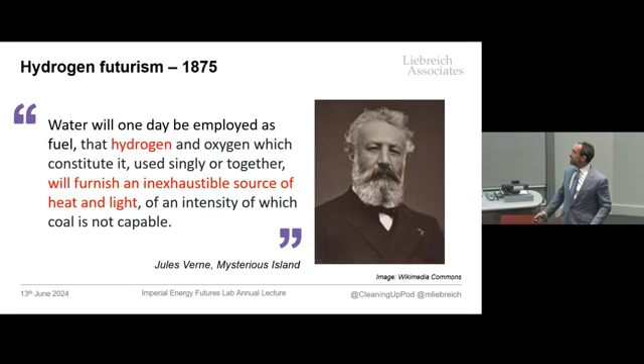It even lured a young doctor, a young chap called Michael Mainelli in the year 2004, who said, without moving almost wholly to renewable hydrogen power, significant climate change is unavoidable. Now, you could argue that significant climate change is unavoidable, but it won't be because we didn't move to renewable hydrogen power. And of course, Michael Mainelli is now the Lord Mayor of London and the person who delivered that 18th Lord Ezra Cadent-sponsored speech.

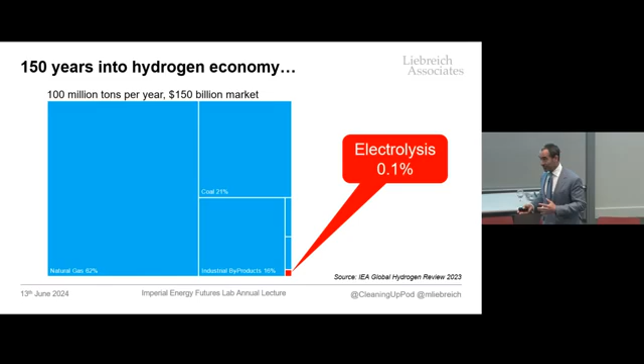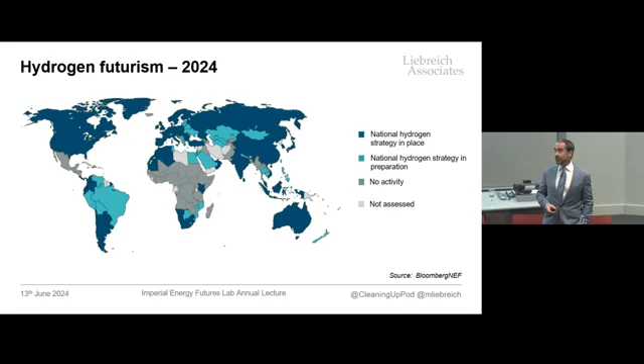Nevertheless, the state of hydrogen, and the extent to which people have been mesmerized by it—there are now 56 countries with hydrogen strategies. Every self-respecting country has one. Japan, for instance, was actually the first country to have a hydrogen strategy, and the first country after the oil shock to go all in on hydrogen. The Prime Minister there talked about shifting to and developing a hydrogen society. So hydrogen economy, hydrogen society—it's kind of the same thing, at least in my mind.

It's critical for achieving decarbonization, says Ursula von der Leyen of the EU. Hydrogen is the natural starting point.

One of the things that's kind of fun is I have a podcast called Cleaning Up. I've had 160 guests or so, and the tagline is leadership in the age of climate change. I've had all sorts of extraordinary people come on—everybody from the woman who glued herself to the Shell headquarters to the person who develops the Shell scenarios. I've had Tony Blair, I've had Tony Abbott. I try to get everybody on, and if you haven't listened, please do, because I have a lot of fun. My co-host Bryony Worthington, who's now over on the West Coast, and we try to get the best guests and challenge them.

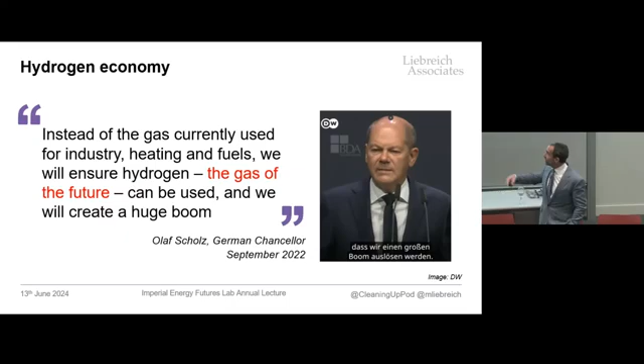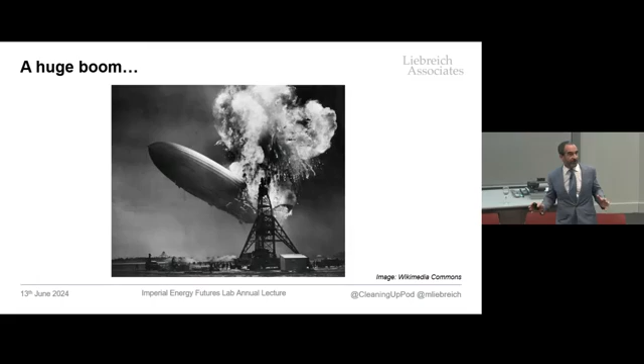Scholz also said we'll create a huge boom. I normally don't show this because it's almost irrelevant, except that the Lord Mayor did show this photograph and said, well, only 36 people got killed—it could have killed 96, but it only killed 36. So I'm sort of obsessive about safety, you'll find that out as well, and I think Kate, whom I've worked with on a few safety issues, will know that.

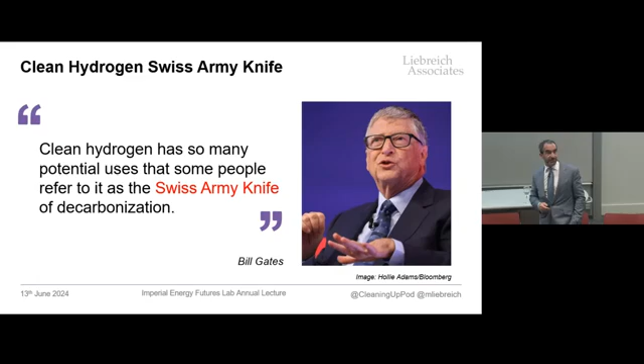Every self-respecting politician seems to have been mesmerized by this whole hydrogen thing. This one's interesting—Jennifer Granholm, Secretary of Energy in the US, says it's the Swiss Army knife: hydrogen economy, hydrogen society, the Swiss Army knife of zero-carbon technologies. Bill Gates says some people refer to it as a Swiss Army knife too, and I'm quite proud of this because I think he's talking about me, since I've been using this. I actually stole this meme from a guy called Paul Martin, who does astonishingly good work. Paul, if you're watching this, thank you, at least for the meme, but also for your work.

And the Swiss Army knife is fabulous—it's a great analogy because you can indeed do all sorts of things with clean hydrogen: transport, heating, chemical feedstock, a building block for chemicals, all sorts of things, land transport, air transport, everything.

The problem is—well, the good news is the analogy is perfect. It's perfect because we've all got Swiss Army knives, right? And we don't do with them everything we could. We don't cut our hair with them, we don't prune trees with them. I went to Japan and said, you don't prune your bonsai trees with them. You don't butter your sandwiches with the little knife.

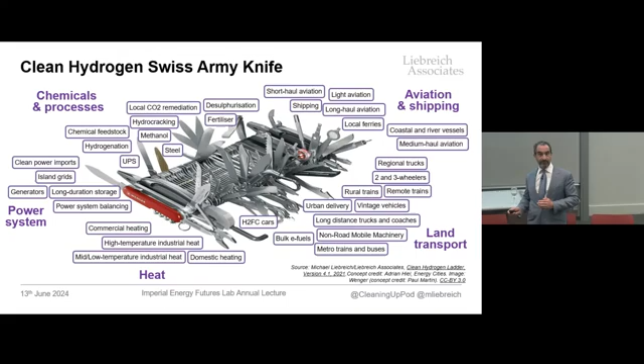There's no way you... why? And the reason is there's almost always something cheaper, safer, and more convenient. Remember those three words: cheaper, safer, more convenient. The only time we really use a Swiss Army knife is if it's cheaper, safer, more convenient, or there's no alternative at all. Hydrogen will play the same role in the economy. It will only be used where it's cheaper, safer, more convenient, which it never is, or where there's no alternative.

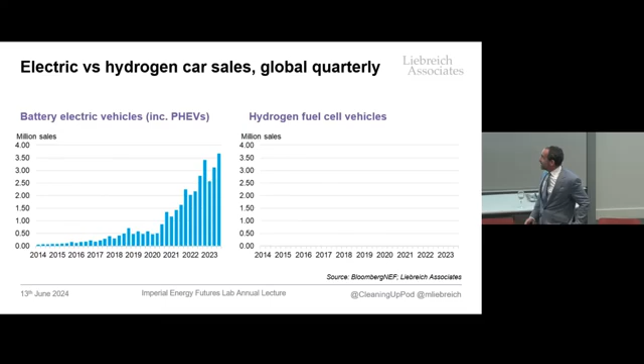I was asked, why do you hate hydrogen? I don't hate hydrogen. I don't have emotions towards elements on the periodic table. But I've been right on that one. So if you actually expand the no-pixels-visible area, what you find is that hydrogen fuel cell vehicle sales are actually declining. How do you do that if you're a solution to climate change and the most promising technology, as we've heard?

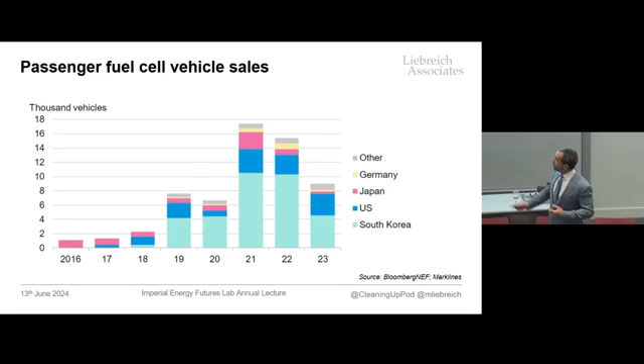And one of the things is very interesting. Can you see there? South Korea, US, Japan, Germany, and other. Where's China? Because the Lord Mayor says today China has the highest number of hydrogen fueling stations for road vehicles worldwide. You can fill up almost as you would with petrol or diesel. That's what he said.

There is a Chinese fuel cell car. It's called the Zhejiang long something, lots of letters, HS something something else. Not a single one was sold in the first 6 months, as of May 2023. It was launched in 2022. Now, there are some fuel cell trucks in China, I think about 6,000. So you can restate that chart, but it's in the pixels that you can't see. It's noise.

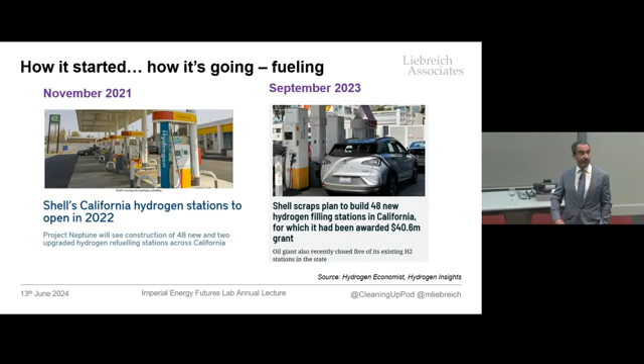Now, fuel cell hydrogen fueling stations are being dismantled. All the Shell hydrogen stations in the UK were shut. Then you've got the California stations, shut. Denmark, the stations were shut. Nevertheless, Toyota is giving 500 fuel cell Toyota Mirais to the Paris Olympics to drive the athletes around. Probably they're organizing fueling through Air Liquide completely separately, but right now there are 9 fueling stations in Paris, of which 2 are actually working.

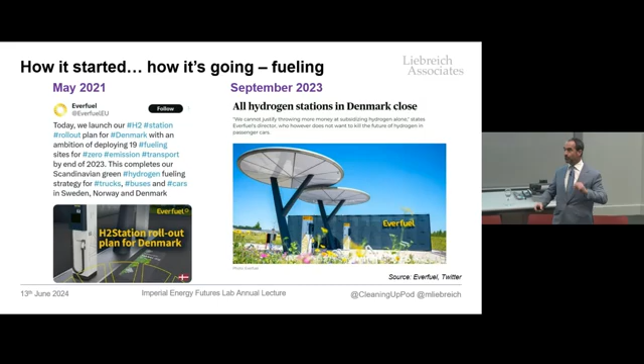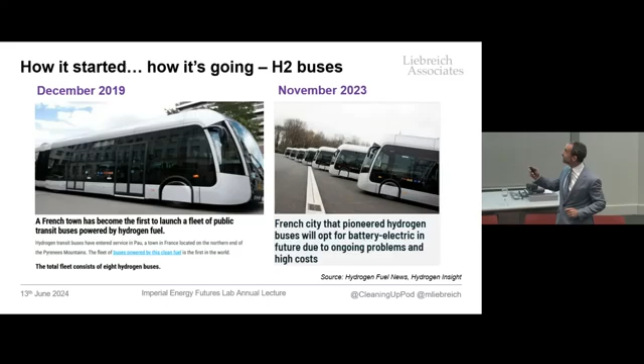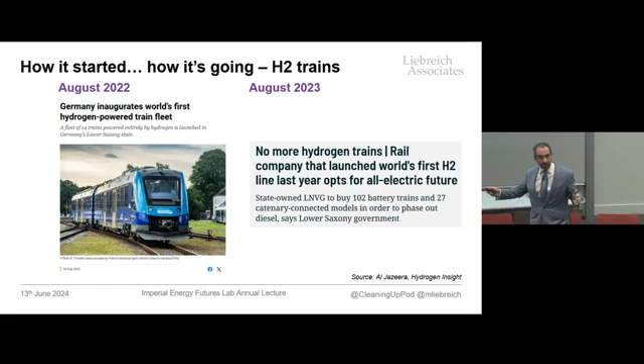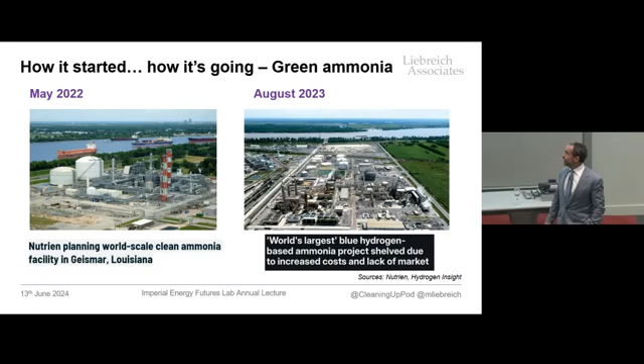Hydrogen production: despite being awarded millions in state funding, once pioneering green hydrogen project has been scrapped. Green ammonia: vast green ammonia plant in Geismar, Louisiana, scrapped. Hydrogen imports via liquid hydrogen, scrapped.

There is a spot of light, though. There is one sector where fuel cells rock, and it is forklift trucks. There's 25,000 forklift trucks powered by hydrogen fuel cells. It's the future.

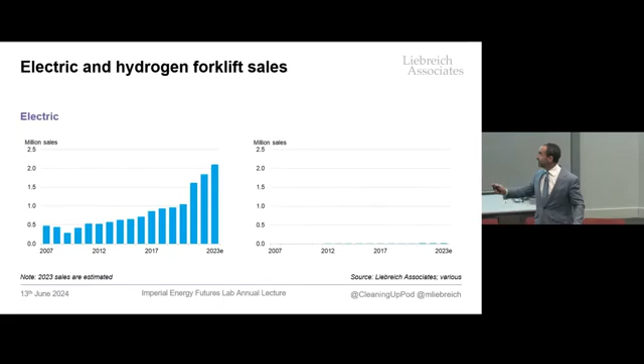Now, the good news is you can see the pixels, right? You can actually see, at least if you're in the front. The point being that 25,000 forklift trucks is nothing. We have to be serious here.

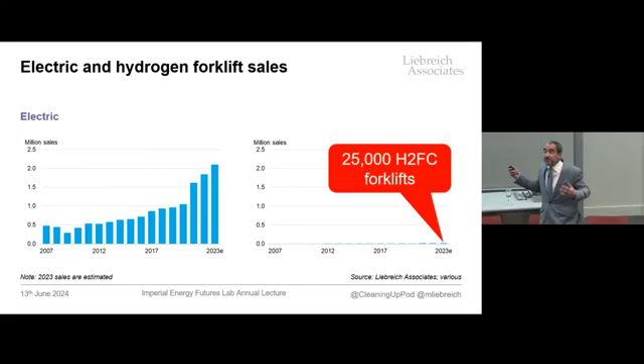What you've actually got is 2 million electric forklift trucks sold. And I think, by the way, the 25,000 is cumulative. Matt, where's Matt? We need my analyst, my assistant, we need to work on this. Because I think that the 25,000 that the mayor is talking about is cumulative, right, and these are actual sales. So they are probably invisible, largely. That's the best sector you can come up with.

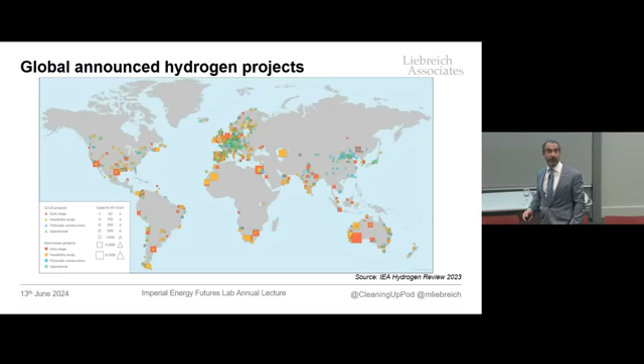Now, despite all of this, because of all the excitement and attention and 56 hydrogen strategies around the world, there are lots and lots of projects, all looking for this: the mountain of carrots. It's not a hydrogen economy, it's a hydrogen carrot economy.

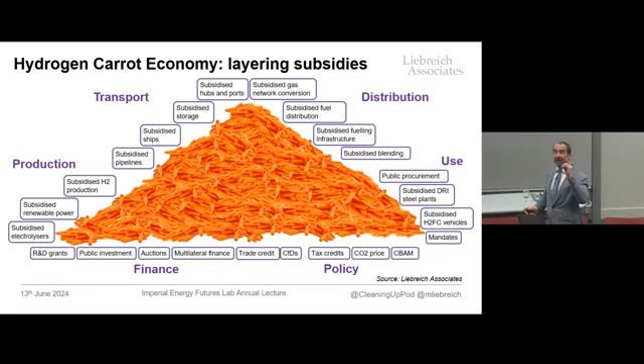Production of hydrogen subsidized, transport of hydrogen subsidized, distribution subsidized, usage subsidized, overall lots of money, finance available, policy supportive. I've counted 24 different sorts of subsidies and support mechanisms. And of course, renewable energy had some subsidies and supports as well, but not 24, and you couldn't layer them. We're going to learn about what layering subsidies means.

Despite all of this, number of projects: 1,600 projects, 14% have got through to some sort of investment decision by number of projects. When you do it by the volume of hydrogen, it's 1%. In other words, the little projects, those cute little trains and buses that don't really work, they're getting approved. But the big projects that could actually perhaps move the needle on the climate, they're not even getting approved, they're not getting funded. 1%. And blue hydrogen, of course, that's natural gas with the CO2 taken out, 7% have been approved.

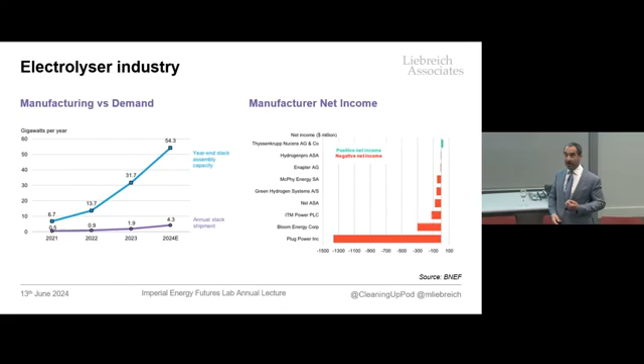The electrolyzer industry has built capacity to deliver 54 gigawatts worth of electrolyzers per year. The orders this year are going to be 4. Also, something like 7% capacity utilization. And red, they're all bleeding red. I should say they're all still bleeding red because they've been doing it for decades.

Now, the question that we have to ask is why? Huge aspirations, mountain of carrots, lots of projects, and nothing happening. Why? So I was at McKinsey, right, McKinsey is intimately bound up with it. When the history of hydrogen is written, there'll be a whole chapter for McKinsey for their work with the Hydrogen Council, generating a lot of the excitement, working on a lot of the strategies. So I was at McKinsey, and I learned to do an arrow across the top of charts.

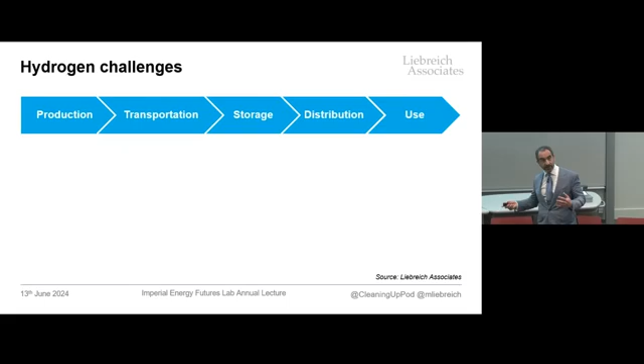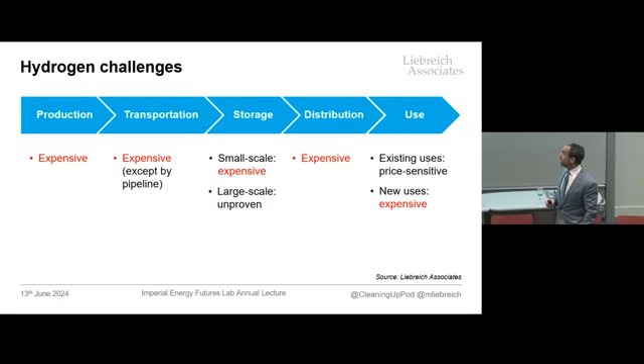If we're going to use hydrogen, we need to produce it, get it to where it needs to be, wholesale, maybe store it, get it right out to the users, and then the users have to do whatever it takes to use it. And the problem is, it's expensive to produce, it's expensive to transport. Storage, small scale, is certainly expensive. Large scale, we haven't done yet. It's expensive to distribute, and it's expensive to use unless you already use hydrogen for fertilizer or petrochemicals.

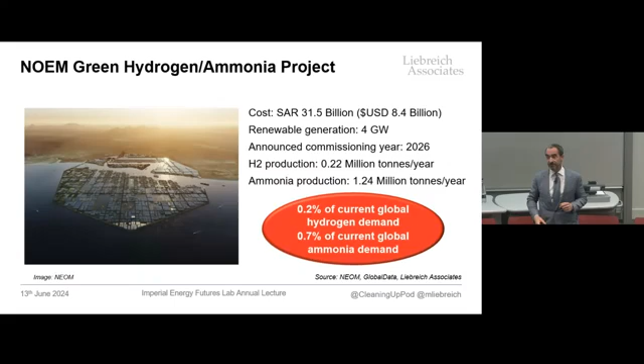And this thing produces 0.22 million tons. 0.2% of the global hydrogen demand. You've got to do 500 of these gargantuan things that take several years to build, and you could only meet current hydrogen demand. 500 of them.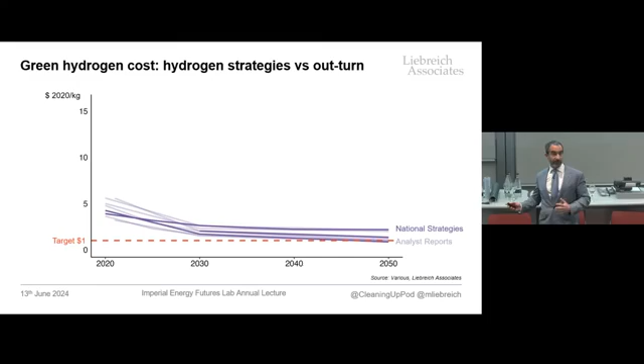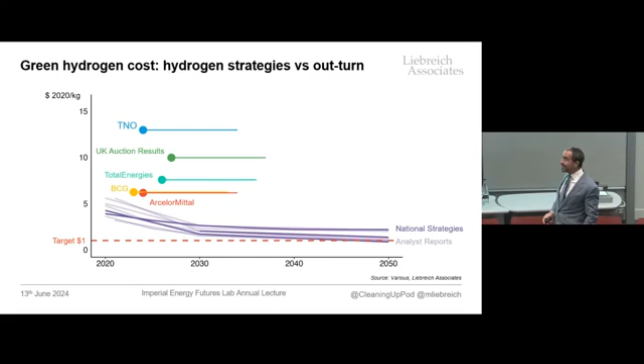Well, where are we? How are we doing? Sadly, for those supporting hydrogen, we're now getting some data. The reason there's a horizontal line is you finance these things over a 10-year or more offtake. The dot is the beginning, when they won the contract or when the data comes from, and then the 10 years after that. And that's where we are. The real cost of hydrogen today is more like $6 to $13 per kilo, green hydrogen.

Now, the mayor's background is a very solid background as a technologist and futurist, an economic technologist if you like. He quite rightly points out that learning curves, the experience curve, is the right way to think about this, and I spent my career calculating them. He says that for electrolyzers they're reasonable, et cetera. And we've seen it with solar modules, wind turbines, batteries, these experience curves. I built New Energy Finance because I realized the experience curve would make these viable technologies. So I'm absolutely with the Lord Mayor on the importance of the learning curve.

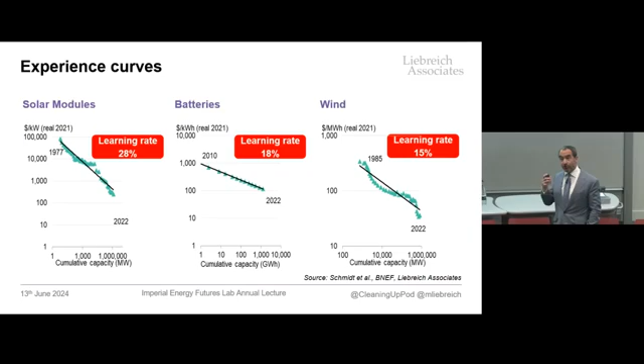Here's where it goes wrong, though. These things have got different learning curves. Solar modules, 28%. Why? Because it's just material science, like a flat-screen TV. Batteries, there's some chemistry involved, also a lot of material science. But wind, 15%. Why? Much more heavy engineering, steel and copper and windings and stuff like that, building big concrete platforms for the foundations and so on.

So when you look at this, there's some very good data from a research organization called TNO in Holland. This is a Dutch example. Their average levelized cost, from about 20 projects where they were given confidential data by real people building these things, was €13.70 per kilo. But look how it's made up: 38% of it is electricity. So we're looking for an order of magnitude reduction in cost, from €13.70 to about €1.37 would be nice, right? But 38% of that is electricity.

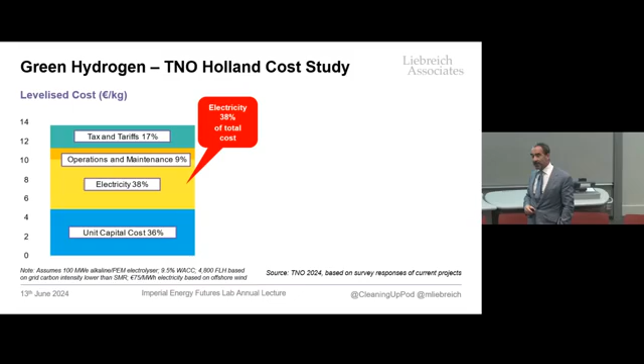Does anybody think electricity is going to go down in cost by 10x between now and 2050? Because I certainly don't. Will solar continue to get cheaper? Will wind? Yes, okay, it will. But 10x? No way.

You can also expand out the unit capital cost. The stuff at the bottom, that's the capital cost. And the problem is that those electrolyzers, which the Lord Mayor rightly points out will become very cheap, only account for 11% of the cost of this average of Dutch projects. A lot of the rest is what I call engineering stuff — so you can now see why I got the visiting professorship, right, because I know the terminology — things like compressors, pipes, flanges, heat exchangers, the infrastructure, the civils, the substation for the electricity, all that stuff.

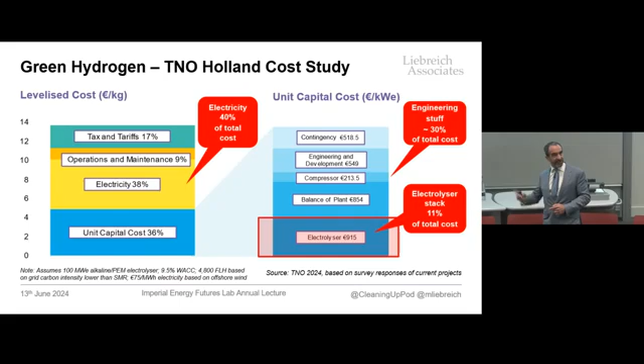Are we going to get a 10x drop in that cost? People are looking at 2030, 2035, they're sure the hydrogen will be cheap. You think we're going to get a 10x drop in that stuff by 2035? Good luck.

So, transportation — this is wholesale transportation. Coal, gas, and oil currently drive 36% of shipping. As we go clean, we'll get rid of that shipping, we'll recycle those ships. It's incredibly exciting. But the Lord Mayor says no, 18%, half of it will remain because it'll be shipping around hydrogen and its derivatives.

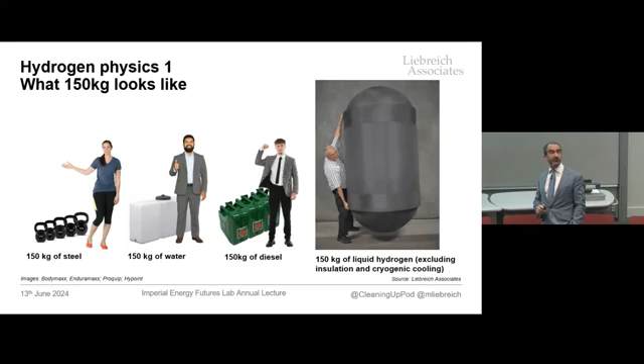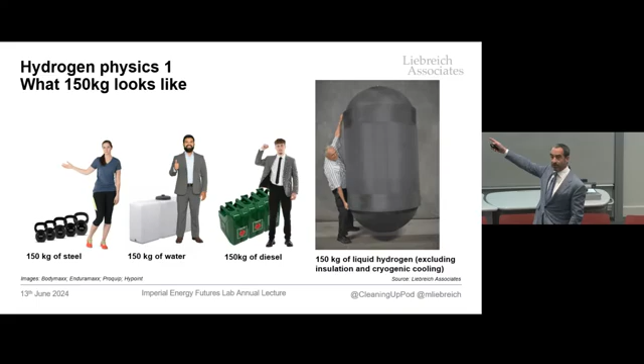So let's do a little bit of physics. That's what 150 kilos of steel, water, and diesel look like. And that's what 150 kilos of liquid hydrogen look like. I've had stand-up arguments about the likelihood of shipping liquid hydrogen around the world in volume with people who couldn't tell me the density of liquid hydrogen.

The Lord Mayor, knowing that I've ruled out any more than homeopathic amounts of liquid hydrogen in the energy system, says it's difficult to argue with a Kawasaki engineer with a huge budget behind him. I think the key words there are engineer with huge budget. Engineers can make anything work if you give them a huge enough budget, but hearing those words makes me happy.

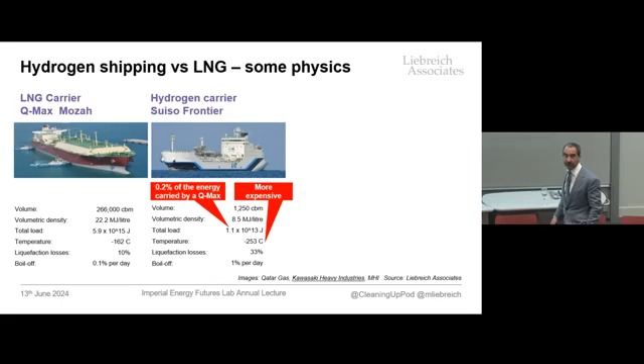Now let's scale that up - Kawasaki, the engineer's got a huge budget, why not? There's the concept ship. It's still a lot smaller than the LNG carrier. If you sailed around with one of those, you'd need 4 times as many ships as the big LNG one. But because liquefaction of hydrogen is so energy intensive, you need to make 6 loads and spend 2 of them just getting the thing to be liquid for the other 4.

But wait, there's more. Remember that boil-off, 1% a day - if you sail 20 days, you lose 20%. So of those 4 loads you did liquefy, you need 1 more ship. You're only going to arrive with 3, or if you want 4 to arrive, you better start with 5.

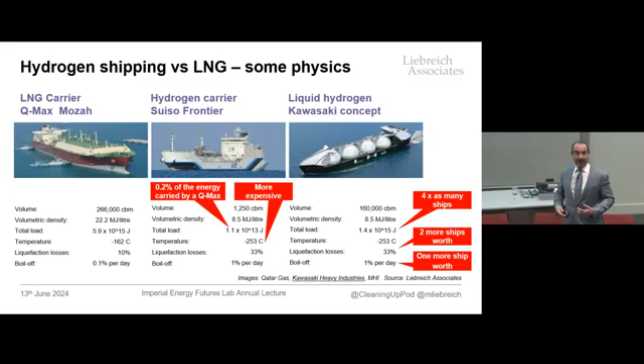It's not just me saying this - this is very good analysis by the Austrian Institute of Technology, looking at how to get all this hydrogen to Europe. Europe has a problem - it's an energy-intense economy, we import energy, Austria has a primary steel industry, and they're under huge pressure to stop buying Russian gas.

The price is up on the left. If you want to get your hydrogen for 3 to 12 euros per kilo - still more expensive than the 1.5 or €1 you're aiming for - the only way to get it via imports is by pipeline. The only way. So they agree, shipping, when you look at the numbers, is simply uneconomic - catastrophic for the European economy if we really tried to do this.

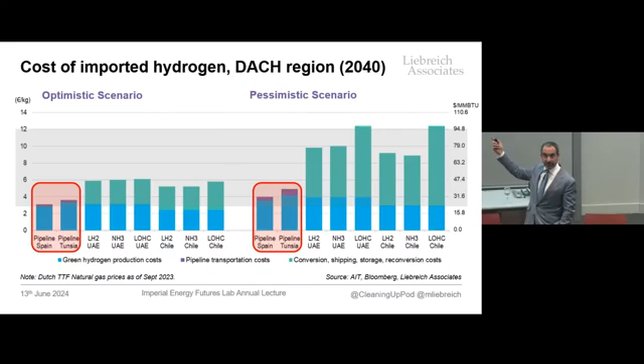Of course, all the aficionados say Michael's gaslighting us, it's a straw man - we're never going to import liquid hydrogen, we know that, we're going to do ammonia, then turn it back into electricity. They cite all those projects - lots of them are about ammonia. We're going to do ammonia from Canada.

Chancellor Scholz and Justin Trudeau signed an agreement - they said it's a hydrogen agreement, then had to do spin and reputation management saying no, he meant ammonia. Japan is going to be co-firing with ammonia too. This is the process diagram - you don't need to follow much of it, though of course you do, because this is Imperial, second best university, or best university in Europe. All you need to know is this: end-to-end efficiency, 20%.

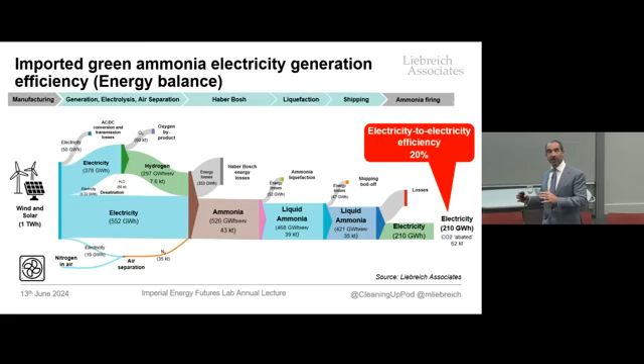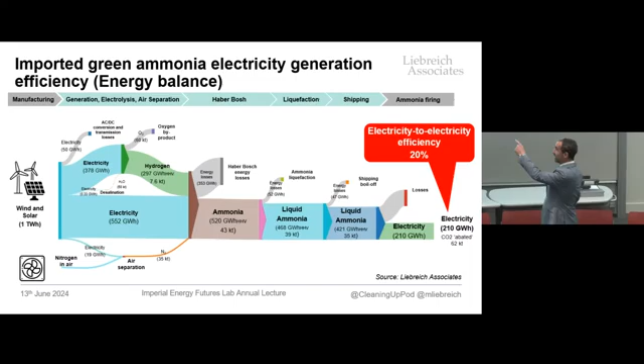So if you start with Canadian wind, 5 units, only 1 arrives. I didn't study economics, but I know that likely means the electricity is at least 5 times more expensive when it arrives, given you're throwing away 80% of it. But that only works if there's no maintenance and capital is free - so call it 10 times, call it 7 times, make up a number. If Europe has to rely on this, it's also catastrophic.

Now, why do people talk about e-methane? We're going to get back to Mr. Alvera, Marco Alvera, who was in that photograph with Ursula von der Leyen right at the beginning. And the reason is the US Inflation Reduction Act, which so many people think we should simply cut, paste and copy.

It allows you to hoover up and layer subsidies. You get a subsidy for producing renewable electricity, a subsidy for turning it into hydrogen or using it to electrolyze hydrogen, a subsidy to capture carbon, and if you import it into Europe, you get an exemption from the EU ETS. But there are more subsidies, because the solar panels might be made in a factory that benefits from the IRA, or you might benefit from the Infrastructure Act in the US.

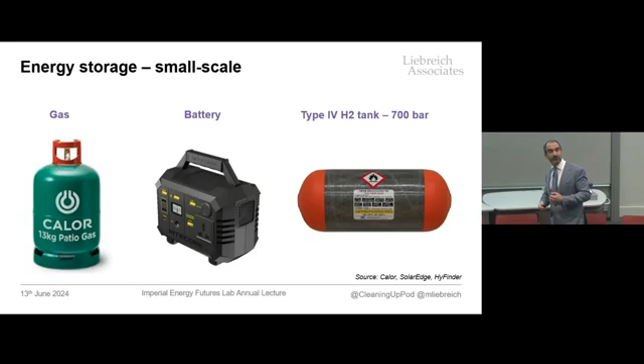So anyway, storage. Small scale, we deal with energy storage — we have familiar ways of storing energy in our lives, things like gas cylinders or batteries. The hydrogen you can store at 700 bar. An aqualung is at 200 bar, but it also doesn't have the nasty characteristics of hydrogen, like embrittlement and so on. It's basically, you can do it, but it's expensive.

The large scale is really interesting, because when it comes to keeping the lights on when there's no wind and no solar — there might be no wind for a few weeks in winter and very little sun — it's a really difficult challenge, and hydrogen there is one of the promising things. Luckily, there are a number of ways we could store either hydrogen or a derivative, and this is a genuinely promising area to work on.

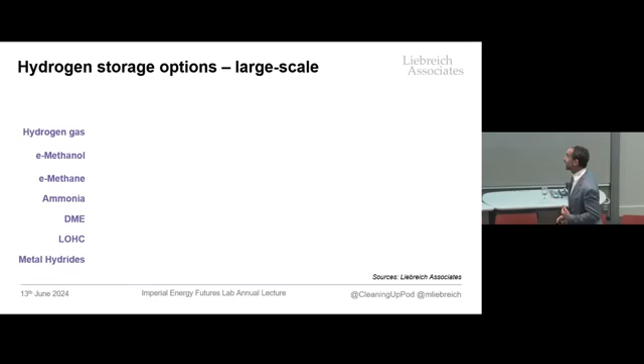But if we're going to do it, my McKinsey arrow — I'm going to use it again — because what we have to find is a large-scale storage pathway that satisfies all the criteria. These are systems problems; there's no point solving a little piece of the problem, we've got to solve the whole of it. For storage, that means we've got to be able to produce the hydrogen or the derivative, move it to where it's needed, store it, get it back out, and generate electricity with it. There are a few promising ways of doing that, but none of them are perfect, and none of them are cheap.

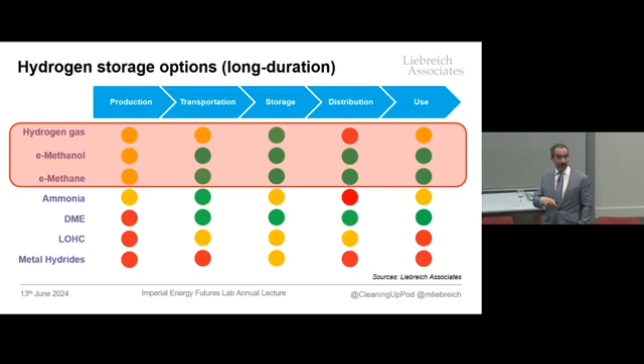So if we're going to do this, and I think we will end up doing this, we better do it as little as possible — as little as possible — because otherwise it's going to drive up our energy costs enormously.

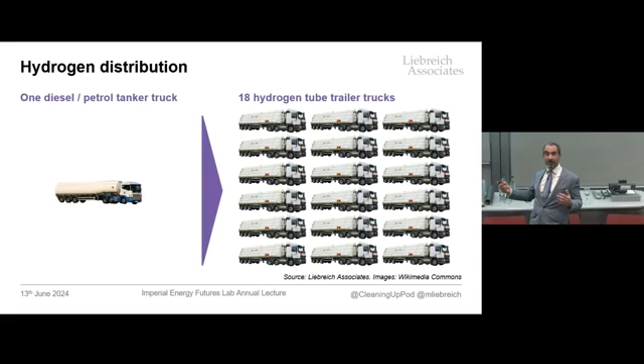Distribution — how many people knew this? There are all these people saying, oh, we're going to have hydrogen trucks, or we're going to do a heating trial in Ellesmere Port, and we can't get the hydrogen, but we can truck it in. One tanker of diesel, if replaced by hydrogen, gets replaced by 18 tube trailers. That means if you're the mayor of a town or on a council, you've got 18 times as many deliveries to your petrol station.

Blending always comes out, and I have no other way of explaining it other than that it's the stupidest thing from Stupidville. You've done all that work making hydrogen, and the UK hydrogen auction cleared at a price not of the 13.70 we heard about from Holland, but 9.27 per kilo. The first thing you do when you blend is reduce that hydrogen to its heat value, which means you destroy 88% of its value. And then you charge everybody who didn't want hydrogen, like every little bakery, because somebody's got to pay for this, right?

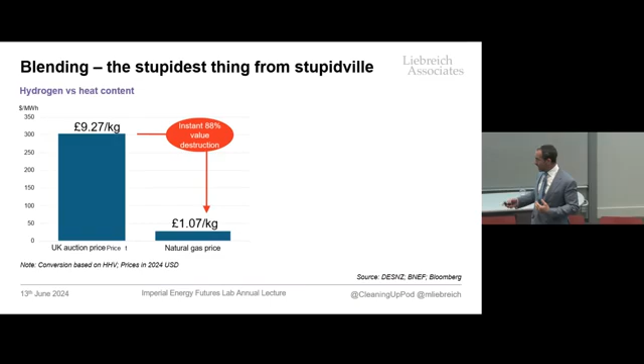Then you get the suggestion that, wait a minute, because we have curtailed wind, there's all this energy being lost, wasted, so surely we have to do something with it. That's curtailment from the average UK wind farm, 5%. It's going up, and it will double in the next few years because we're building so much offshore wind. But the worst UK wind farm, something like 30%, let's say.

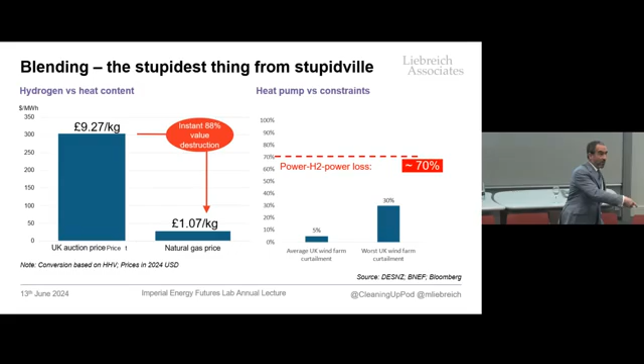But here's the thing: when you go from that wind electricity to hydrogen and back to electricity, you're wasting 70% of it. That's equivalent instantly to curtailment of 70%. So why would you do that? But it's actually worse than that.

The Scottish energy minister said we should be using this curtailed wind for heating. So hang on a second - let me take that wind, curtail whatever percentage it is, and then put the small remainder into a heat pump, probably an Octopus heat pump. And let's compare that to making hydrogen, pumping it around the country, and then putting it into a boiler.

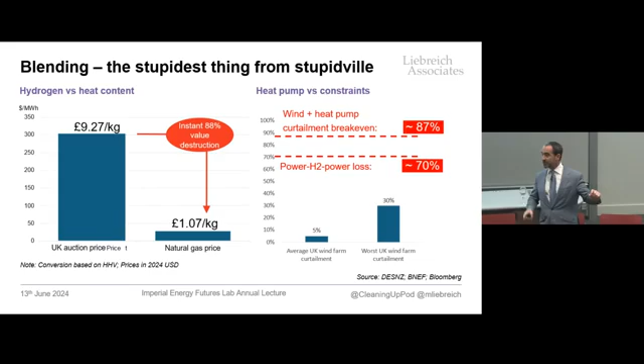The break-even curtailment for that ludicrous pathway is 87%. In other words, as long as you get 13% of your electricity surviving curtailment, when you multiply it by a coefficient of performance, it beats the hydrogen route - electricity to hydrogen, to compression, to putting it in a boiler - and both of them come out at about 50%. 50% of the original electricity ends up as heat in your front room.

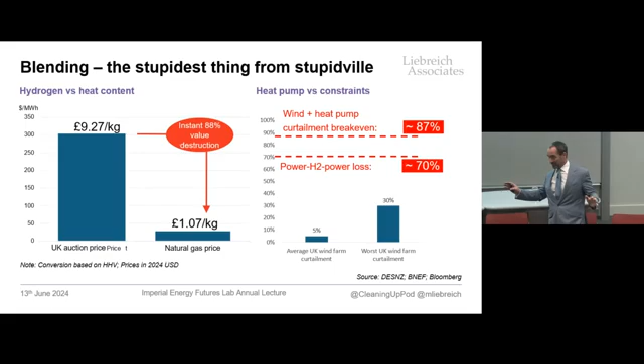87% curtailment - I mean, it's going to get bad. The Daily Mail is going to go nuts when we reach 10% curtailment, right? But not anything like 87%.

So, usage. Now you've got two different categories. You've got people who already use hydrogen, and of course they could just use clean hydrogen - fertilizers, petrochemicals. But where it gets really expensive is when it's new uses. Why don't we use those cars? Well, setting aside the upstream stuff about efficiency, which I think we've already dealt with, the fact is...

Hydrogen fuel cell cars - and this is where I might offend Nigel, so close your ears, don't listen, la la la - they're worse cars. Look at the one on the left, hydrogen; the one on the right, look at the number of parts, look at the complexity. You can't fold the seats down because it's full of hydrogen canisters. It doesn't accelerate as well.

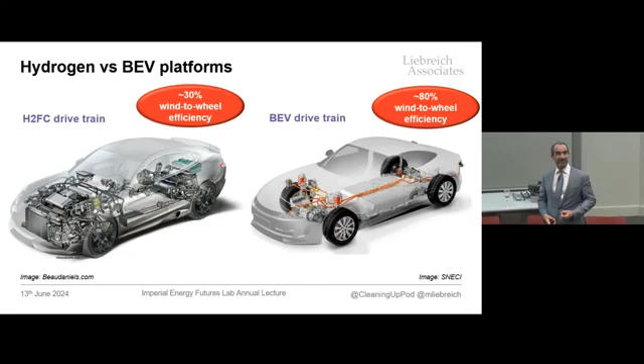It needs more maintenance. If you want to take a fuel cell out of a Toyota in a garage, the manual for how you do that is 280 pages long, because it starts with 'first vent your hydrogen.' And you only get to a spanner on about page 30.

There is a reason in physics for this.

But engineers are brilliant. Engineers with big budgets are even more brilliant, right? And you could get an engineer with a big enough budget to make a Formula One steam-powered car. It wouldn't win any races, though. And the reason it wouldn't is it's the wrong powertrain, it's the wrong system, it's the wrong fuel. So to pretend that we got cheap solar, so we must get cheap hydrogen, it's kind of equivalent to saying we broke the speed of sound, so we'll break the speed of light. They're just different.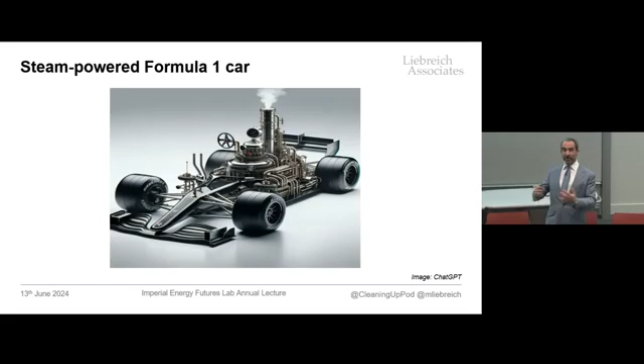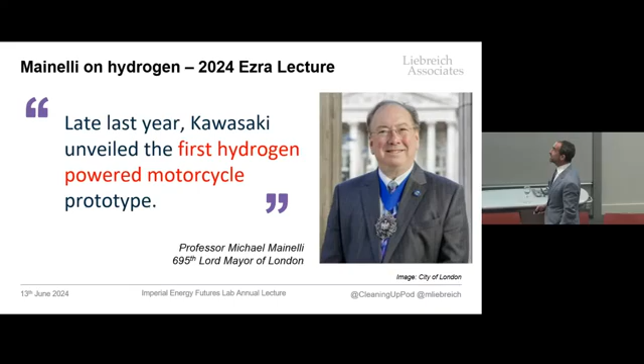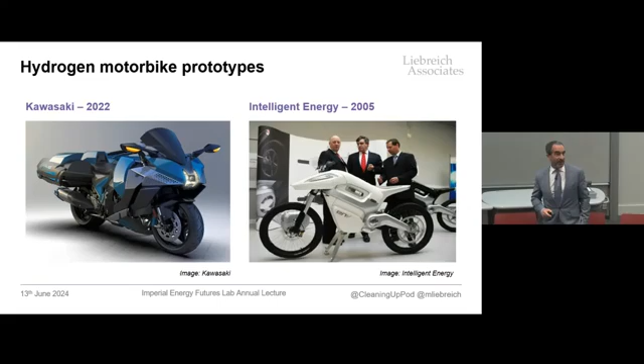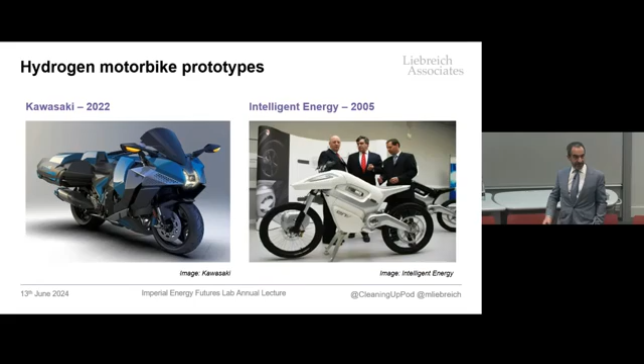Now, the Lord Mayor, to whom I'm responding, was very excited because last year Kawasaki unveiled the first hydrogen-powered motorcycle prototype. On this, he is simply incorrect, because there's the Kawasaki, and there was this. Some people here will remember Intelligent Energy - they had a hydrogen fuel cell motorbike, and that in the middle, because it was so long ago, is Gordon Brown helping to launch it. There's a reason why it didn't succeed: it's a bad motorbike, all things considered.

Now, hydrogen trucks - everybody's still excited about hydrogen trucks.

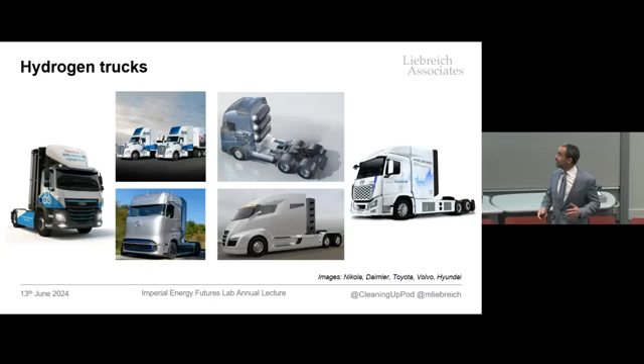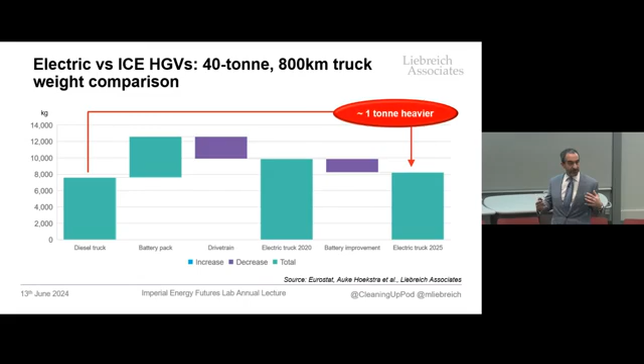Now, everybody's very concerned about the weight of electric vehicles and trucks. They think this is a showstopper. But when you take a truck and remove the engine, the gearbox, the differential, the diesel tank, the exhaust system, and most of the stuff to do with managing vibrations, you end up with a truck that's about a ton heavier.

And sure enough, all of the major manufacturers of trucks are launching electric trucks. Up there, Pragma Charge is a company that I have incubated to provide charging for them.

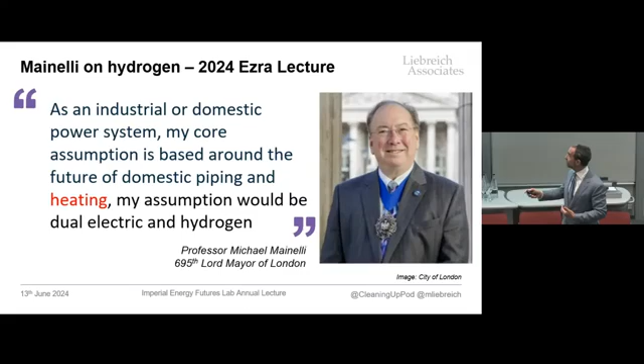Heating. Kate's excited now. This is yours.

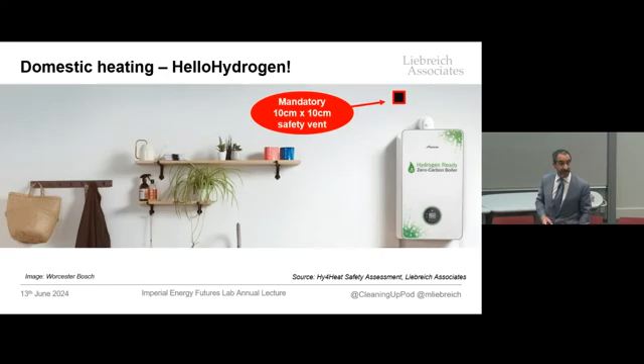Okay, hydrogen heating. This is the hydrogen-ready boiler being marketed so heavily by the UK gas industry. What they don't tell you is this: the only safety protocol for a hydrogen boiler in the UK involves knocking a 4-by-4-inch hole in the wall of every room with a hydrogen appliance or significant pipework. That's what HSE says, and engineers who've worked with hydrogen will tell you why.

But this is not new news - this is something I discovered, actually. The world's first hydrogen safety regulations from 1824 also said you need continuous ventilation independent of the will of the workers there employed. The workers there employed, by the way, is me in my kitchen if I have a hydrogen hob.

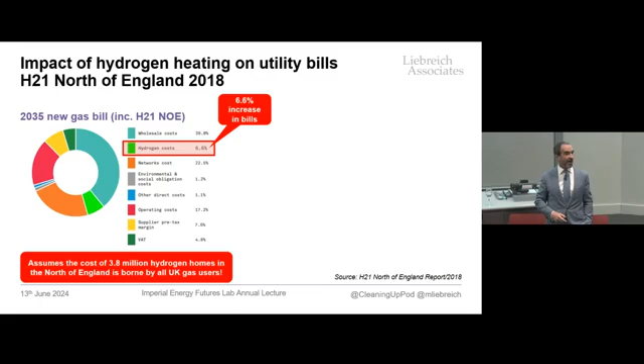A few years ago, there was a report into how much it would cost the UK to move to hydrogen heating - the H21 North of England report - and it concluded it's only a 6.6% increase in bills. The number went viral, it was all over the place at the time. But what they did was take 3.8 million households in the north of England, convert them to hydrogen, and spread the costs over all 28 million homes in the UK. I don't know which consultancy they used, but I don't consider that legitimate.

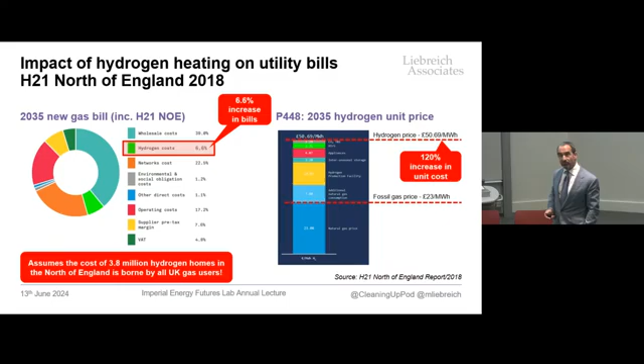Now, if you go to page 448 of the same report, you discover something very interesting: an actual breakdown per unit of the cost of hydrogen. You discover that it actually drives up the cost of the fuel by a factor of 2 - your utility bill would double if we all moved to hydrogen. And here's the most interesting thing about this report: it's also sponsored by Cadent.

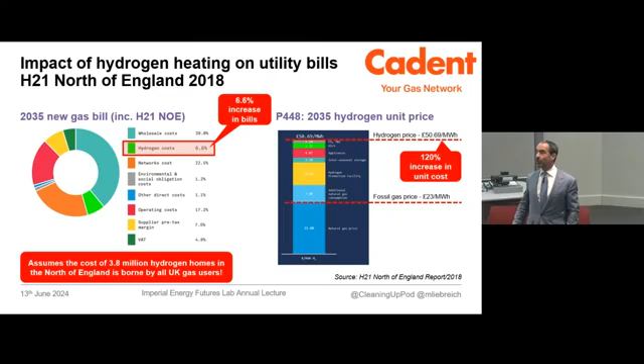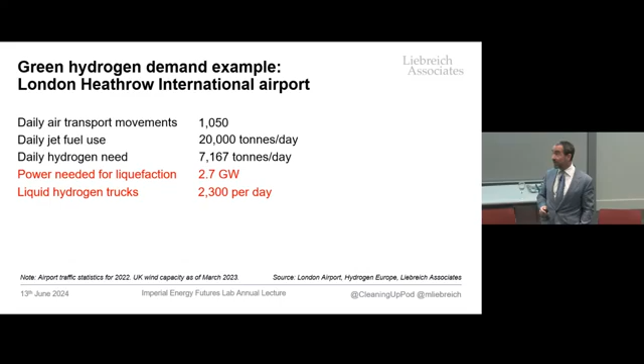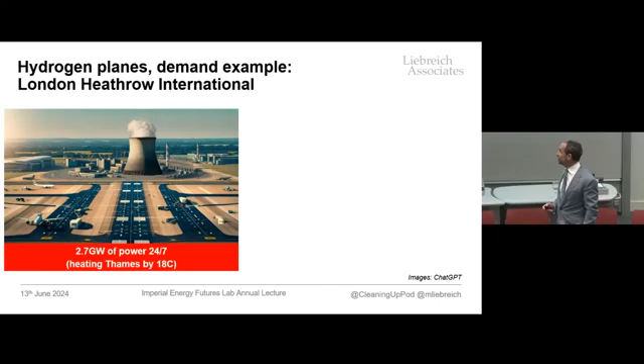Hydrogen air travel is back, sure. The problem is not even the aeroplane - the problem is actually how you get liquid hydrogen to an airport. There are two solutions: lots of power to liquefy it at the airport, or you could bring it in via trucks. Courtesy of Matt and ChatGPT, we have two options for the future design of Heathrow, for real.

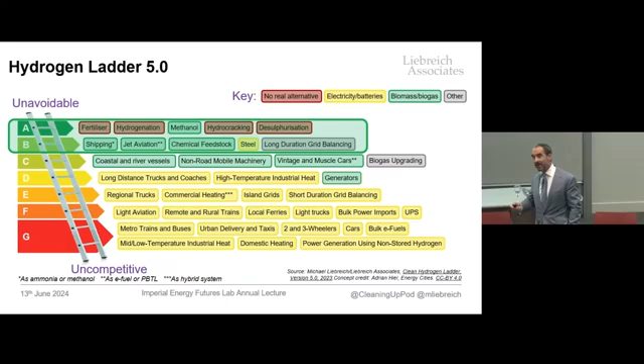Now, I pulled all this together in the famous hydrogen ladder, which many of you will have already seen. There's some things at the top we have to use clean hydrogen for, and some other things we'll probably use it for - we've talked about long-duration storage, steel, and so on. If anybody here thinks we can do all of that with green hydrogen alone, it would take 6 times all of the wind and solar ever built.

Now, in Dubai, COP28, we decided we would triple capacity by 2030. So if you just want to do the top 2 rows of the hydrogen ladder, all of the new build, all of the existing, all of the new build till 2030, times 2, is going to go just to decarbonize those 2 rows - no clean heating, no clean transport, no decarbonization of the grid, no clean industry, just that. That's why I've made peace with blue hydrogen, because I consider the alternative to be a bad outcome for the planet.

Now, there's also some things at the bottom - I call that the row of doom. I think we've talked about most of it, and some things are almost certainly going to go the way of the row of doom.

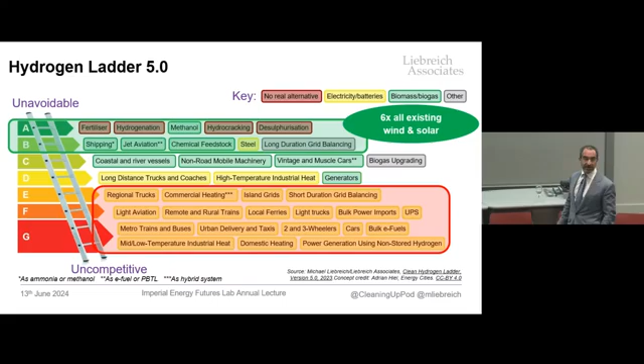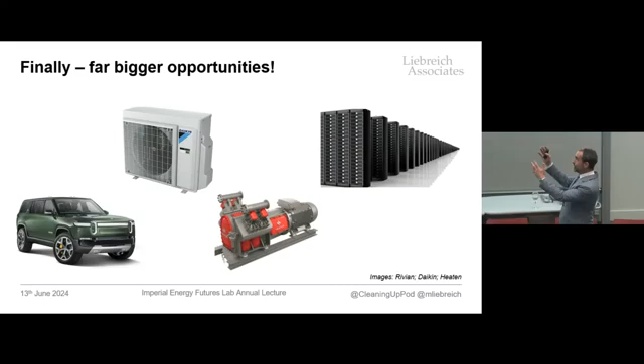I want to leave you with a final upbeat thought, because this does not mean that things are hopeless. What's astonishing is that while everybody is talking about hydrogen - and I was at the FT Hydrogen Summit yesterday, so much talent, so much attention, so much political capital, so much money, hundreds of billions committed - meanwhile we're faced by four fantastic opportunities: electric transportation, electric heat pumps or electric space heating, electrification of industry, all of which will help absorb more variable renewables because they can also be demand responsive. And if you're interested in opportunities, machine learning and data centers will both help us manage this complex system, but they also present huge challenges. If you want something interesting and promising for the climate to work on, look no further. Thank you.